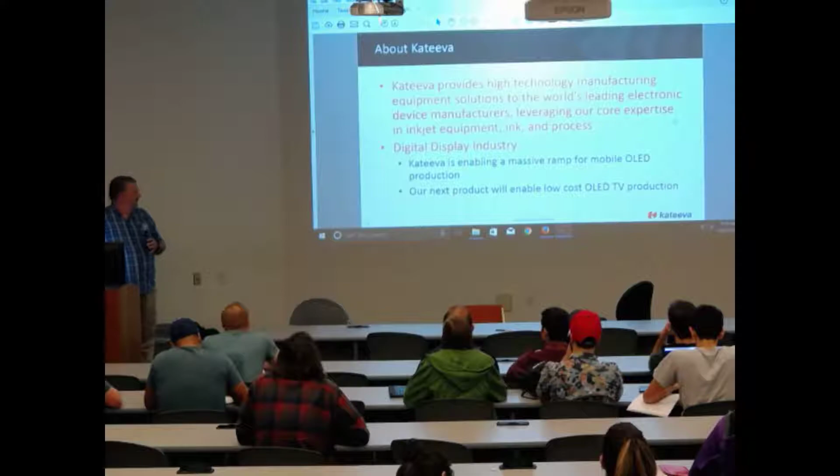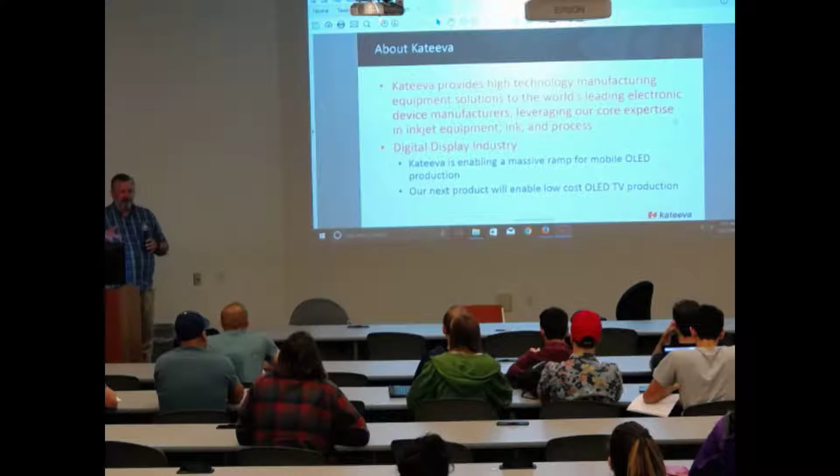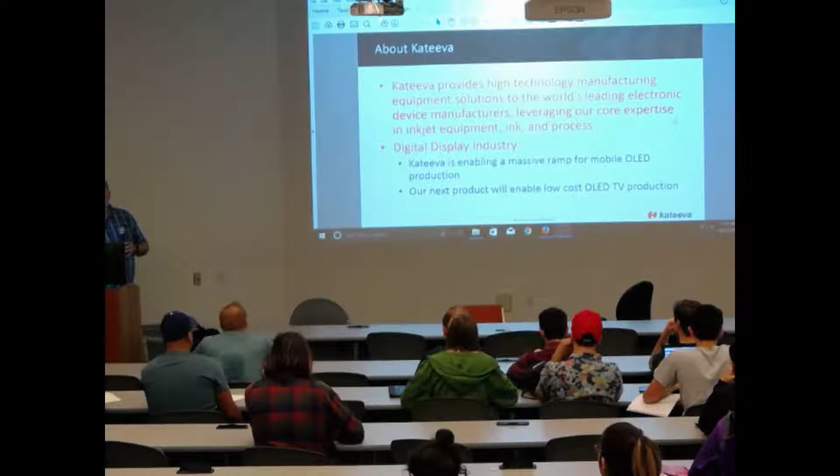Let me tell you a little bit about Kateeva. This long orange blob basically says that Kateeva is part of the manufacturing industry that makes electronic devices. Mostly what we work on today are displays - mobile displays and larger tablet and TV-sized displays using organic LED technology. So right now, in the last year or two, Kateeva has basically made it possible to ramp mobile OLED production by providing a technical solution to a problem that there wasn't a solution for previously. And right now we're working on enabling the production of lower cost OLED televisions and larger displays.

So some of you may not remember the CRT, but displays have moved lately from LCD and are moving rapidly towards organic LED.

I'll tell you a little bit about the benefits of organic LED. It is cheaper, the displays can be made flexible. With control of lighting from the individual pixels, you can have lower power, very thin displays. They're already quite thin, but they can go thinner. They can be shatterproof, lighter, and have much better picture quality.

In order to make OLED displays, Kateeva makes printers, large inkjet printers, like this is part of one. So this motion stage has three axes of motion control. The Y-axis moves these large sheets of glass or plastic that the displays are mounted on underneath the inkjet print heads, which are mounted on the X and Z axes, which move them above the substrate.

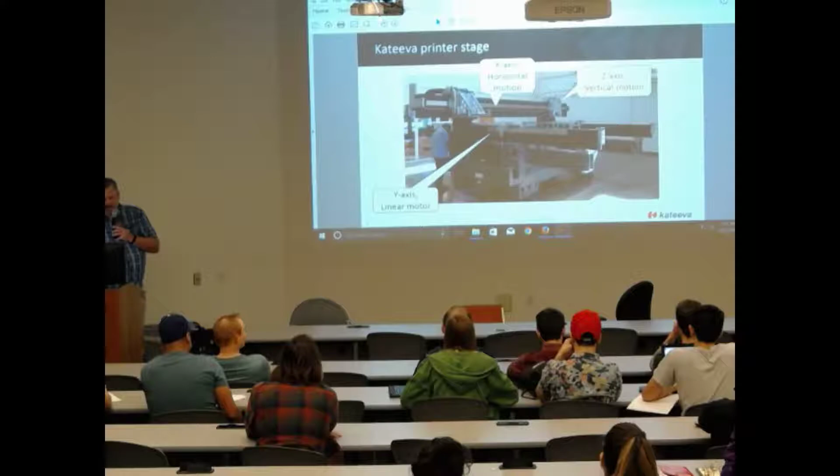So the Z-axis is a little bit special in that it's fighting against gravity, and the weight of the printhead assembly can be quite substantial. So the fine motor control of this device is done with a linear motor, but we use air cylinders and pressure regulators to relieve some of the weight of that assembly so that we're not using a lot of current to hold it stationary, and when we do lose mechanical control, we can use pneumatics to push it away from the glass substrate and keep it from falling.

So the objectives of our project this year is to build a test bed made up of an air cylinder, pressure regulator, maybe a small computer like a Raspberry Pi, air pump, and a spring to simulate the load in order to design a controller that's capable of holding position under a changing load.

So adjust the pressure to keep the thing where it's supposed to be. Control the velocity of the Z-axis, in this case, when we want to move it, and compensate for mechanical friction to smooth out the motion.

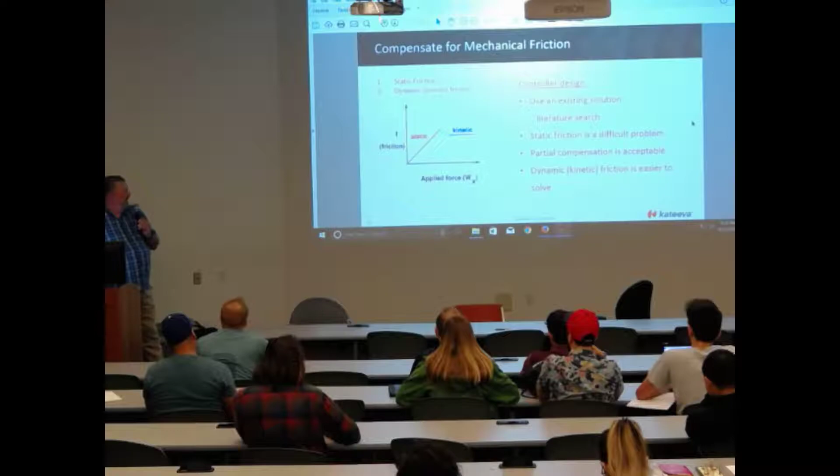Controlling for position, speed, and acceleration, when you're faced with stiction when it's motionless versus less friction as it's moving, we think will require a bit of research and experimentation. So that's the gist of it. If you have any questions.

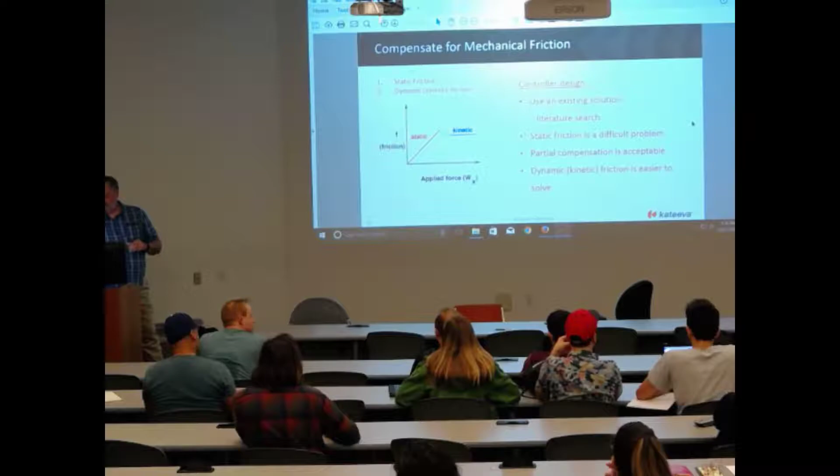Is that getting on the recording? Yeah, if you repeat his question.

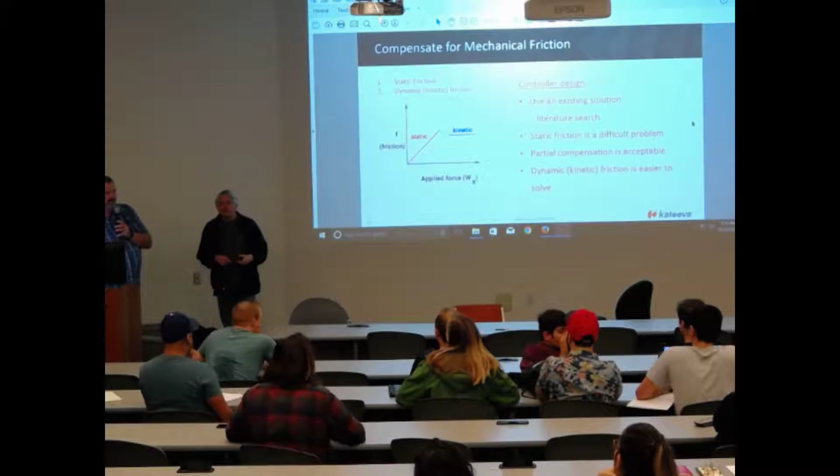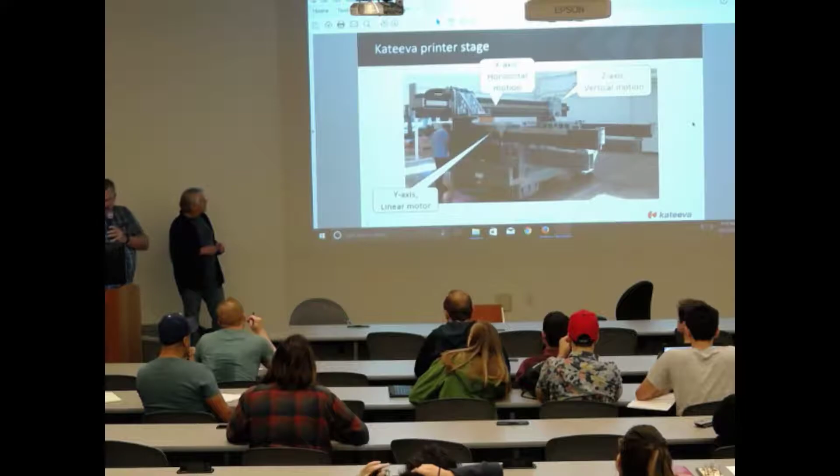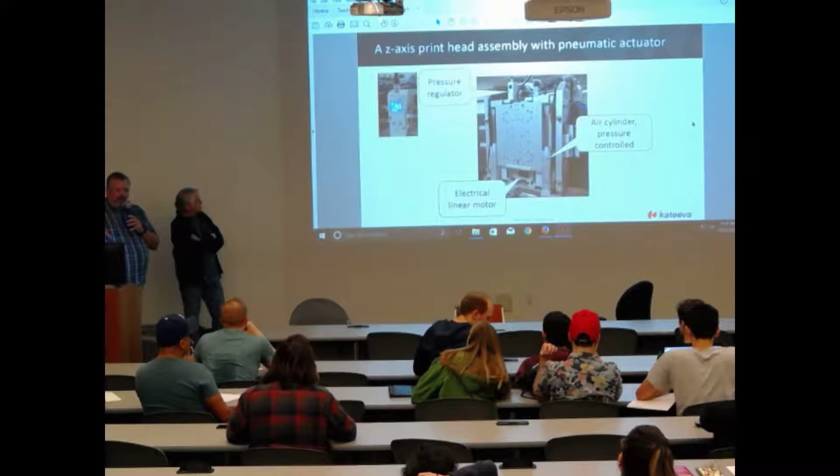So you asked about the OLED manufacturing process. I had a slide but took it out in the interest of time. Essentially, OLED manufacturing involves depositing layers of materials, much like semiconductor chip manufacturing. For OLED, we work on two layers at Kateeva. One is an encapsulation layer, where the mobile display has been fabricated and we want to protect it from moisture and oxygen. We use a printer to print a thin, consistently thick layer of protective material, which allows manufacturing not only of OLED displays but also flexible OLED displays, since the material can flex.

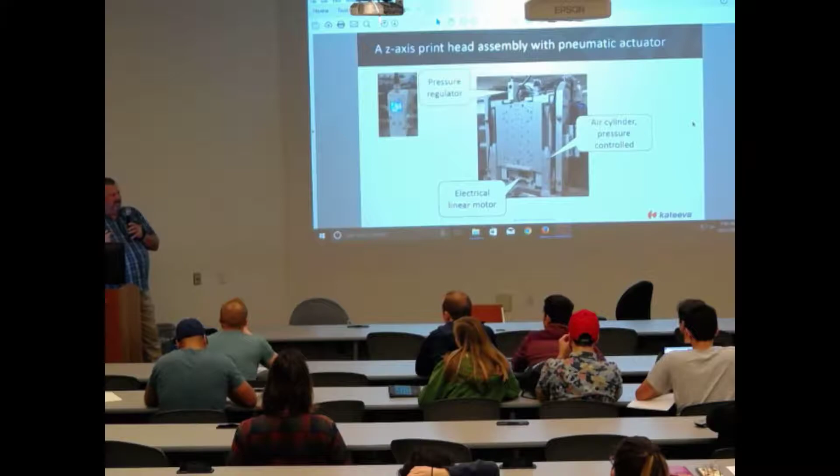This is the enabling technology for some mobile displays that have gone on the market recently, where they're bent around the corners, or some prototypes you may have seen for folding or rolling displays. Being able to encapsulate that with a layer thick enough to protect it but thin enough to bend and not be easily damaged is something we're using inkjet technology for.

The other application, maybe more to your point, is today's OLED television manufacturing process. They make an OLED backlight - using organic LEDs to provide white light through the back of the TV, which is then filtered by an LCD panel, the same as every LCD TV has been for decades.

What we're doing with inkjet technology is printing the OLED materials directly into the subpixels - red, green, and blue - so that when you excite them with current, the subpixels themselves provide the light. There's no backlight, no filtering, you're not trying to block out white light to make black or filter white light to make red, green, or blue. So you don't need that LCD panel in front, and you don't need a backlight.

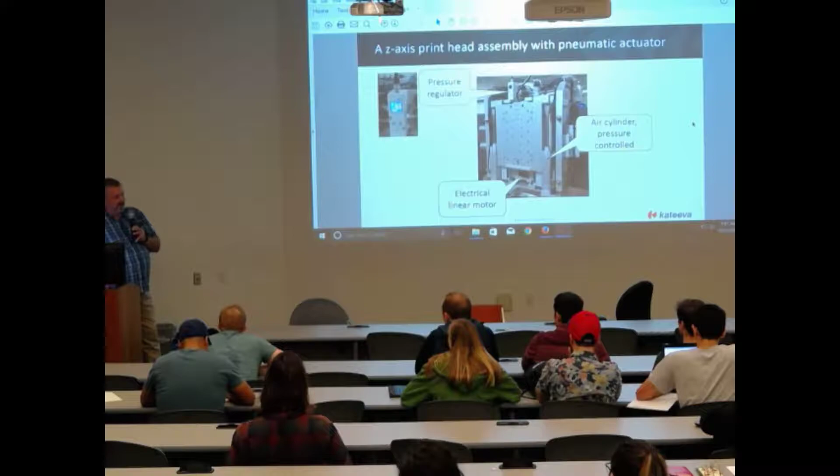And you have illumination control at every pixel, actually at every subpixel, so you can make totally black blacks, which is what everybody talks about with display technology - how dark the unlit area appears. High contrast, very thin, fewer layers. That's the part of the current display manufacturing process we're trying to attack.

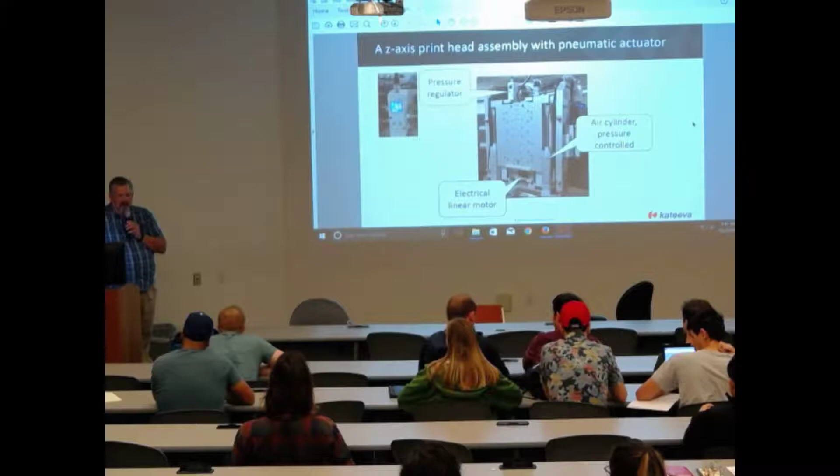The question is about the technical aspects and whether there'll be programming involved, and how much. I would expect some embedded programming required to implement the feedback cycles - reading in the position sensor, controlling the pressure regulator. We're thinking a small embedded controller, probably programmed in C or C++, would be adequate for demonstrating different techniques for controlling position and velocity.

Did I answer your question? Any more? We had more hands up there earlier. Anybody else?

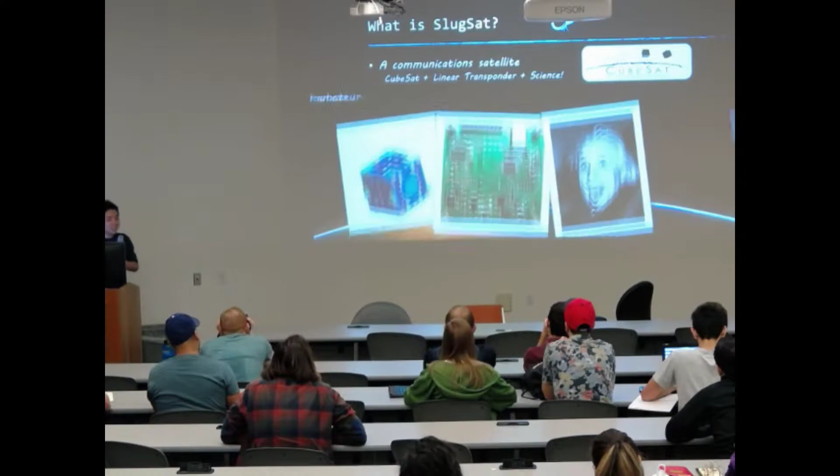Got it, okay. So the first question is, what is SlugSat? Basically, it's a miniature satellite that's meant to be used for communication. It has 3 components: the first is a CubeSat, the second is a linear transponder, and the third is science. You might not know what that means yet, but hopefully you will by the end of the presentation. What it's meant to do is SlugSat enables the communication of licensed amateur radio operators within its footprint.

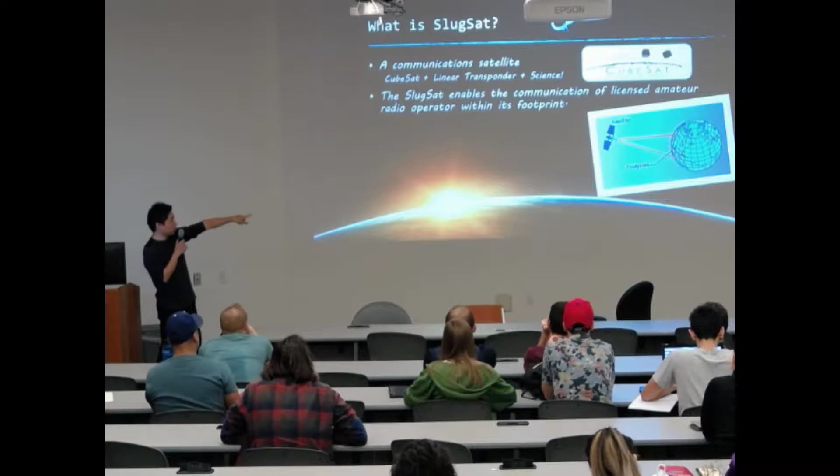What a footprint is, if you look at the image, you can think of a satellite like a light, and it'll project a ring onto the Earth. If you're within the ring, the satellite will be in your sky, and if you're not within the ring on the Earth, the satellite will be below your horizon. That's what a footprint means. I'll explain more later in the slide.

Next slide. So why is it important? Amateur radio is actually your First Amendment - it's freedom of speech. The example is in 1986 in Chernobyl, there was a little hiccup in the power plant and it blew up. Obviously a source of all evil in that era, the Russian government tried to cover it up. So the first news that came to the West was actually a transmission from a local amateur radio license operator. Basically, nothing can control you once you get the amateur radio because it's a direct connection. So if you're American, you better join our team.

Amendment. And then this is our project motivation. Our primary customer is the amateur radio community, and our goal is to install an amateur radio linear transponder - I'll talk about what that is - into a CubeSat. I'll also talk about what that is later. It's actually meant to be a pilot program that establishes a foundation for future UCSC students to work on space-related projects. Next slide.

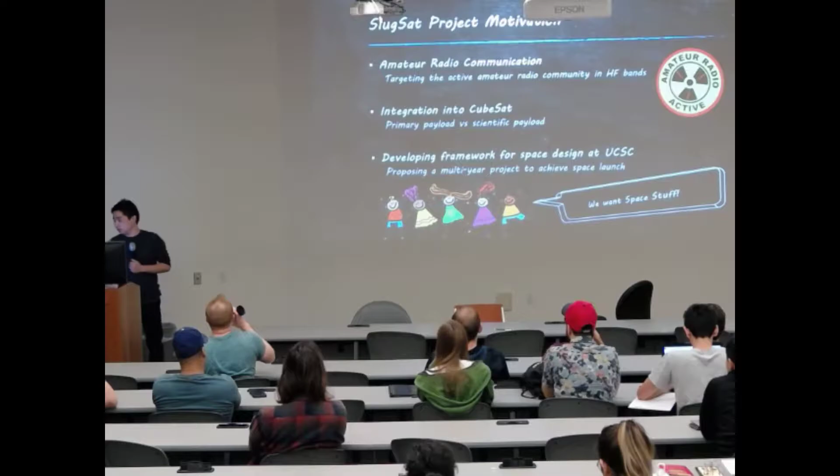So what is a CubeSat? The standard unit is 1U, which is a 10 centimeter by 10 centimeter by 10 centimeter cube, about 1.33 kilograms. This comes from when a rocket is launched, it's designed for a specific amount of weight, say 500 kilograms. When NASA designs a satellite, it's rarely exactly 500 kilograms, so what happened before was they put dummy weights on there. Some student at Cal Poly came up with the idea that instead of just putting iron or whatever weight to stabilize the rocket, they could sell that space to get rich quick. That's where the CubeSat came from.

The price for 1U is about $100,000, but a lot of that is launch cost. What happens is we get our design and pitch it to a space agency, whether that be NASA, Cal Poly, JPL, SpaceX, whatever, Russian. If they approve it, they'll pay for the launch costs. That's how it works. Next slide.

So to give an idea of where the satellite orbits, it's actually in low Earth orbit, which is defined as anything under about 2,000 kilometers. If you don't know how space orbits work, the altitude of the orbit is basically equivalent to the velocity of the satellite because of how the science works. If we launch at 450 kilometers, there's actually air resistance in low Earth orbit - it's not permanent. At 450 kilometers, the CubeSat will orbit for around 1 year, and then it will fall out of the sky; the orbit will decay.

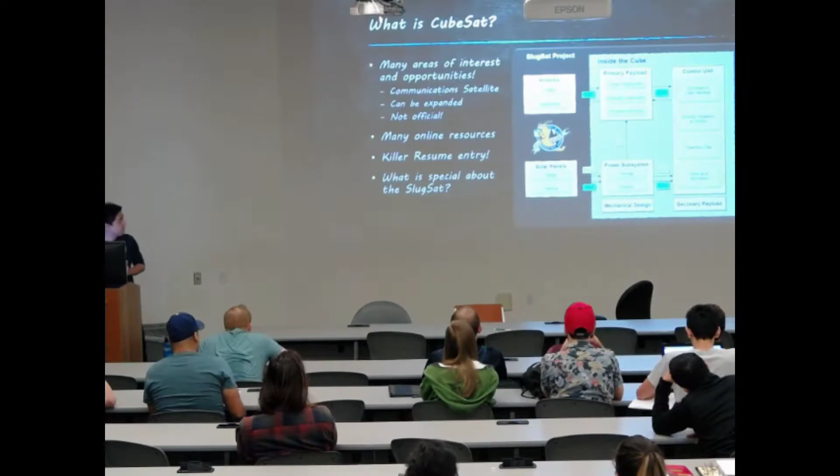So here is an example of what could be on a CubeSat. There are a lot of different areas you can work on. There's mechanical stuff, there's secondary payload, there's CubeSat control, magnetic, solar panels, that's not me.

And then there are many online resources available. So if you're interested in any of those fields, it's a good idea, and any of them can be expanded. So say solar panels, you can design your own solar panel if you wanted, from scratch, if you want to work with silicon wafers. That could be a possibility. Or we can just buy it, because a lot of it is also commercially available, which also means there's a lot of online resources that you can look up if you get stuck.

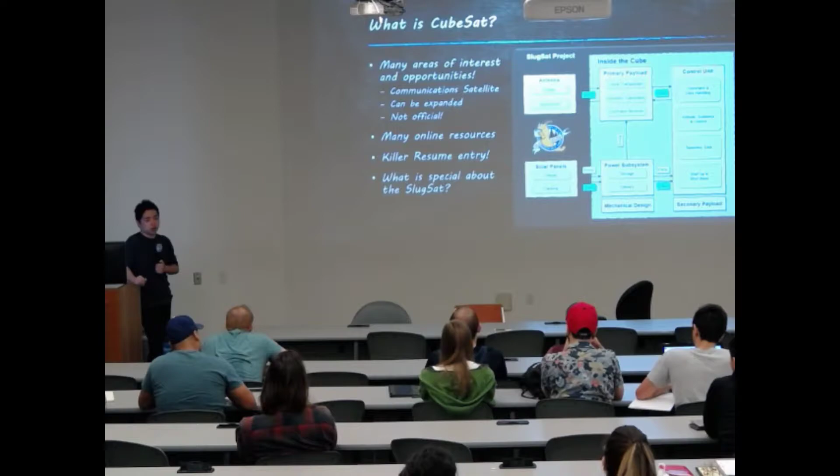So you also get a killer resume entry if we finish. So that's the goal.

But the next question is, since there's so many satellites getting launched, what's so special about the SlugSat? Why are we special? Why would someone pick us over someone else?

So our primary payload is the linear transponder, which is the part that enables amateur radio communication. And this diagram is actually wrong, but it gives you an idea. I was going to fix it, but I didn't.

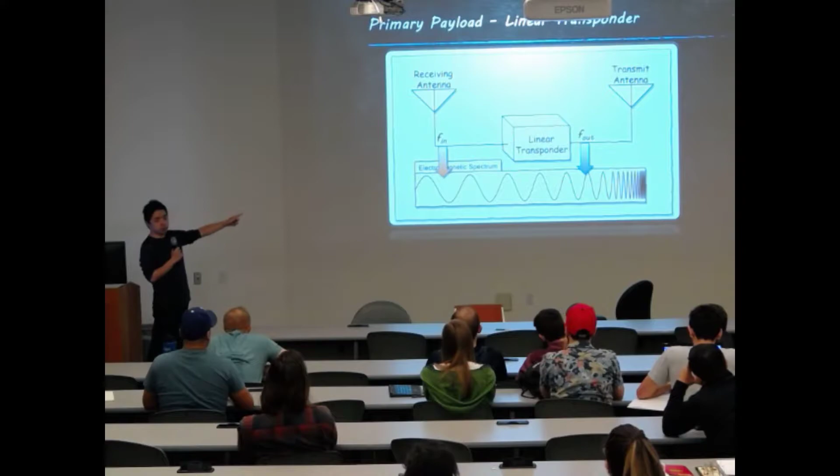You have an input frequency and an output frequency, and there will be a specific offset that the linear transponder gives. That's a specific offset. And if you move the input frequency a little bit, the output frequency also moves in correspondence. So that's basically what the linear transponder does. There's some problem with this diagram, but that gives you an idea of what it does.

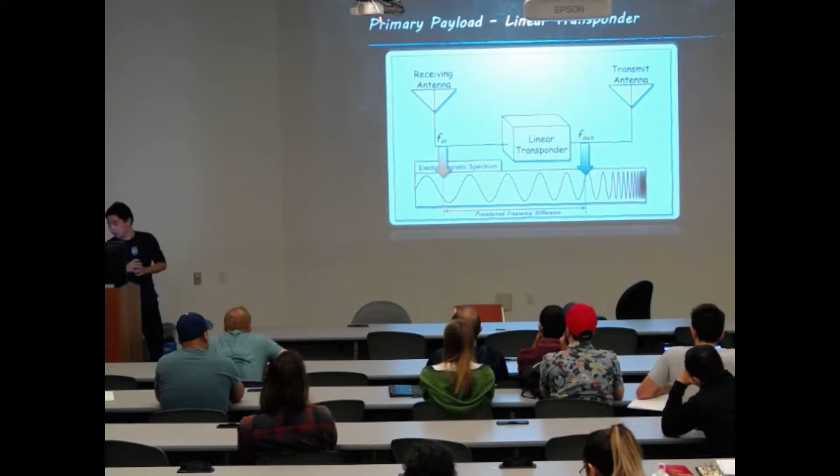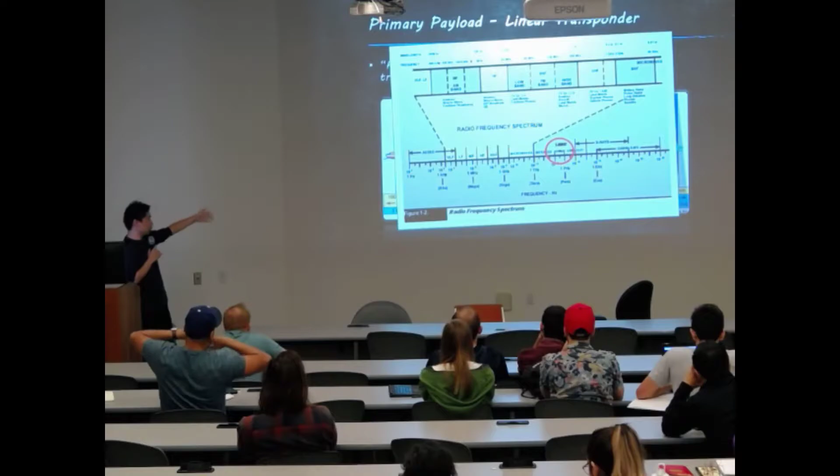So where in the electromagnetic spectrum are we talking about? We're talking about the radio frequency spectrum. And as a reference, the red circle is where the visible light spectrum is. So it's towards that.

And then this picture shows colored version of the same thing, basically. Normally satellite communication is done at the higher frequency end, the very high frequency, ultra high frequency, and super high frequency. But our satellite is in the HF high frequency range, which is near the radio part.

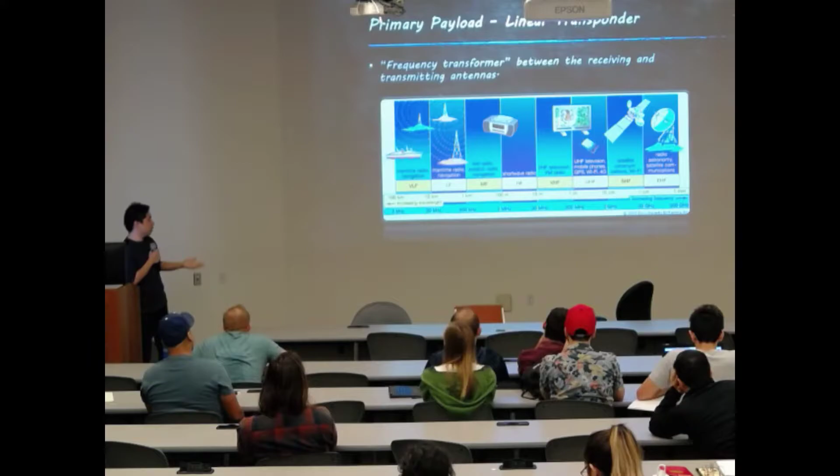And why is that so? Normally when you have a satellite, you have to point your satellite dish or antenna at the satellite as it goes across the sky. You have to track the movement of the satellite on top of Doppler shift and Lorentz transformation and all that. But because of the structure of the HF antenna, we actually don't have to aim it at all. As long as you're within the footprint, you can communicate with the satellite. And sometimes if you're outside the footprint, you can also communicate with it.

I'll talk about that in the scientific payload. But some people might ask, since you don't have to point your cell phone at the cell tower to talk on your cell phone, what's the difference? The difference is cell phones actually need infrastructure, like cell towers. With amateur radio, you only need whatever gear you need, and the other person has their gear, and you don't need any cell towers.

The example would be in Puerto Rico when they got swarmed by the hurricane. All of their cell towers went down, and the Red Cross actually called for amateur radio operators to help them relay information because there was no infrastructure in place.

And also, you can't just call ISS to talk to an astronaut, unless you know that number, in which case you should give it to me. But that's not the point.

So actually, if you want to know detailed information about HF propagation and stuff, Professor Petersen will give us a talk at the amateur radio meeting this Wednesday at 6. He'll talk about how satellites communicate with ground stations and how HF propagates. So plus, if you want to work on a project, you're going to need a license eventually, so might as well start early.

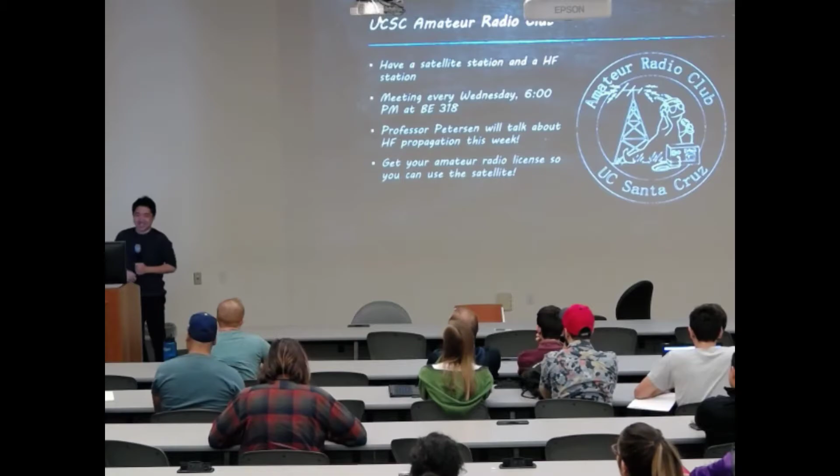Yeah, but didn't I give that talk last week? No, the HF propagation. I thought you, it's okay. We talked about satellite communications at the last meeting. Do you want me to repeat that? No, I thought you were going to say something related to that. Yeah, it's fun, but that's about all I can add. Yeah, sure. We'll figure out the details at the meeting.

So with HF, normally with higher frequencies, the waves just go through the atmosphere. But with HF, there's actually an angle where the radio frequency won't go through the atmosphere and bounce. It'll start bouncing around. This is pretty well documented, but there are other factors that affect it, like the sun cycle, the weather, and the time of day.

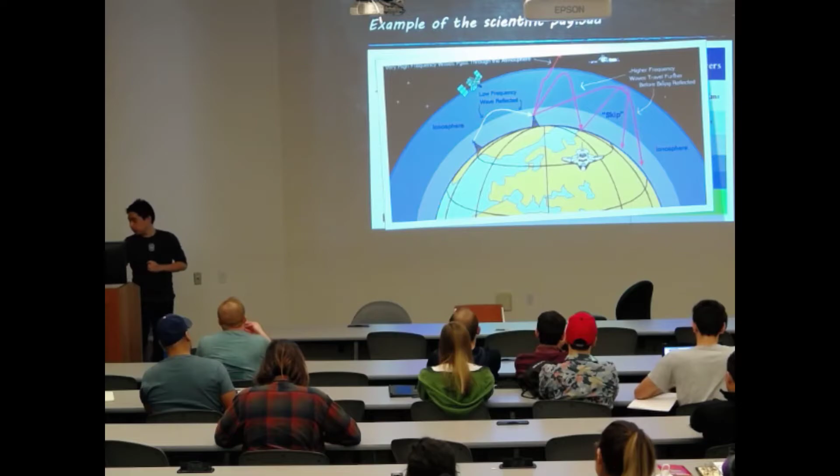So what our scientific payload could be next is we can document this, since they just basically need more data. There's not enough satellites in space right now to give us information about exactly when it's deflected and exactly when it goes through. The advantage of this is we can actually do all the data collection on the ground, so I don't think any extra hardware needs to be implemented on the satellite, but we can talk about that in the team meeting.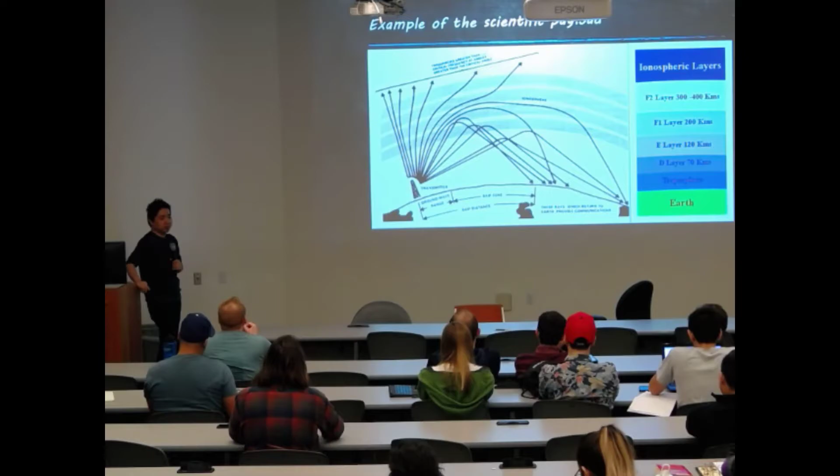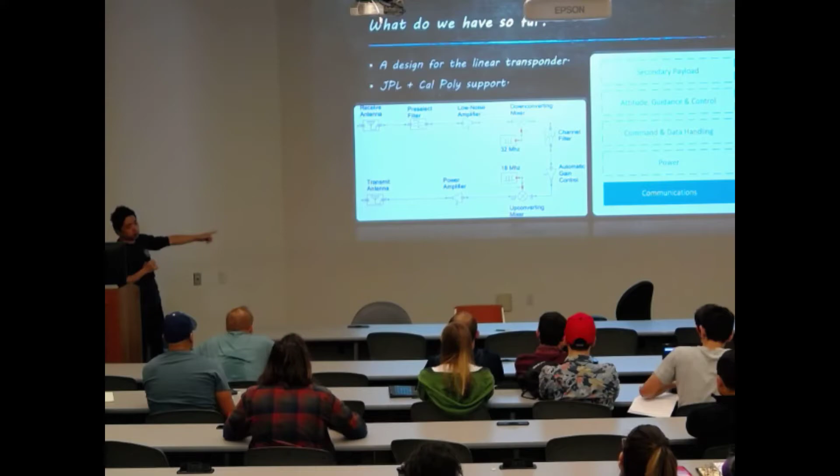So here's an example of a project that was started last year by a group of seniors. This is what they came up with, and that's actually just a primary payload. That's just a communication section, and they did not even finish because there were actually a lot of factors that might affect it.

An example would be if you do a quick Google search about what the temperature differential is on the dark side and light side of orbit, it's about -200 Celsius on the dark side and +200 on the sun side. But actually, Cal Poly launched a CubeSat that only had 2 temperature sensors, one inside and one outside, and they documented the temperature difference as 30 degrees on the sun side and -5 on the dark side inside the satellite.

So why is that? It's because there's no way for heat to dissipate in space since it's a vacuum, so you only dissipate through radiation. That's what I got out of the paper anyways. So there's a lot of stuff to consider, like the temperature standard for the industry is -40 degrees Celsius to +85 degrees. So would that work for our satellite, or do we have to calculate the heat within our satellite to keep our components at that temperature? So it's a lot of work.

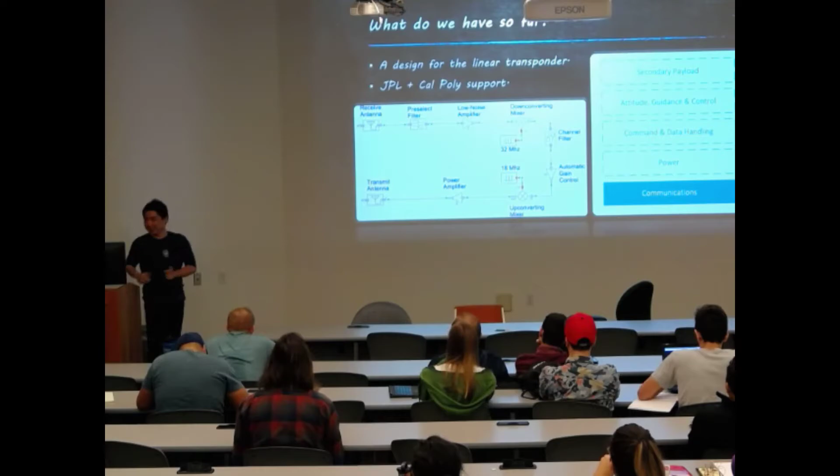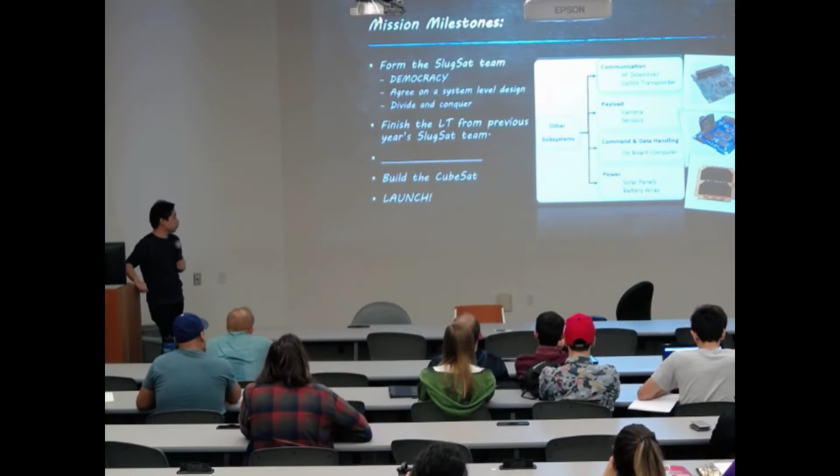That's the example. So right now our number one priority is to form a team and figure out what the team wants to do with our CubeSat, because there are a lot of opportunities and everybody has to agree on a design.

The simplest design would be to put a linear transponder on there and a power system in, and just launch it without carrying anything. But then who would pay for that? So there are trade-off studies we have to consider, and we have to agree on a charter. We'll have to finish the linear transponder from the previous year, do some more work, then build the satellite and launch it. It might be a lot of stuff, but it's okay.

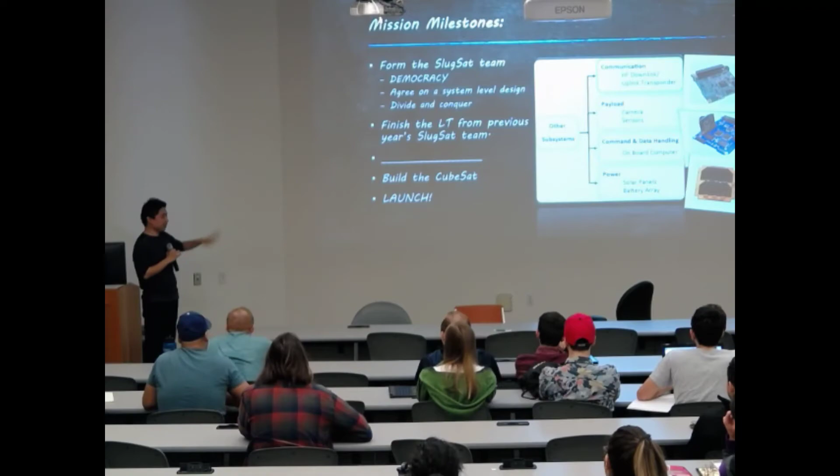So who are we looking for? We're basically looking for everybody, and whoever joins the team has to justify their role on the team. So if there's anything you're interested in with any of the systems, you can talk to us and we'll try to fit you into the program. But it's a democracy, right? Everybody has to agree, so come to our talks and we'll discuss it.